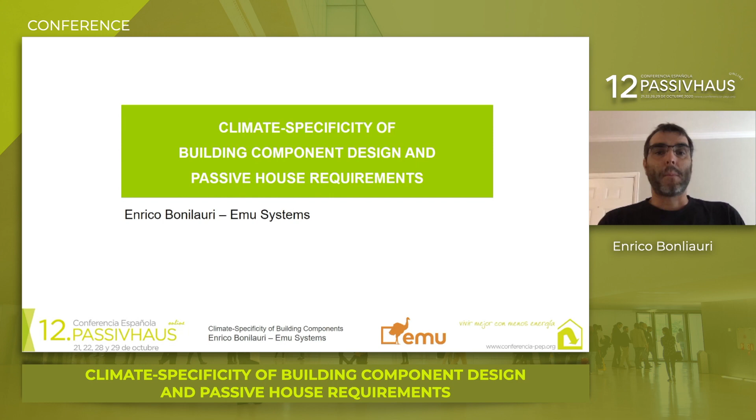What we do is teach builders in North America how to implement passive house cost effectively in different climate zones. The US and North America ranges from Florida, which is very hot and humid, all the way to Alaska, that is very cold and dry. So we need to educate professionals on how to implement the principles of passive house effectively in different climate zones in a way that is cost effective, safe, and that will deliver very good and efficient buildings that meet the passive house standard. So the presentation I'm giving you today is called Climate Specificity of Building Component Design and Passive House Requirements.

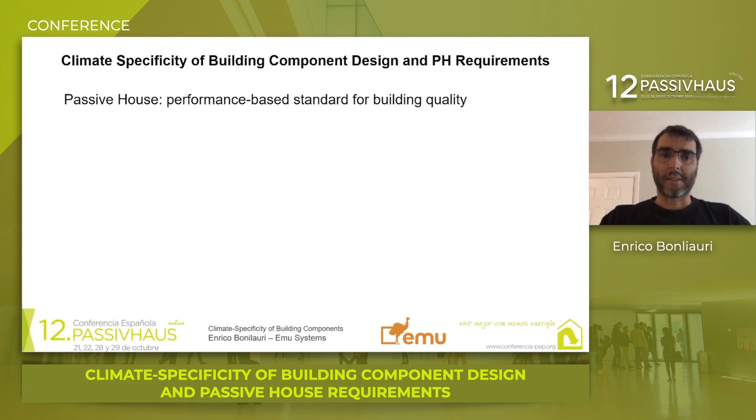So climate specificity is very important for any building design, and specifically for passive house and the success of these projects. Passive house is a very advanced performance-based standard for building quality with specific goals that deliver healthy buildings through high hygiene, very high thermal comfort. The buildings end up being very durable over time. And with that, you have very high energy efficiency. And the key to that is also to optimize all of the above in order to have very cost efficiency in the project.

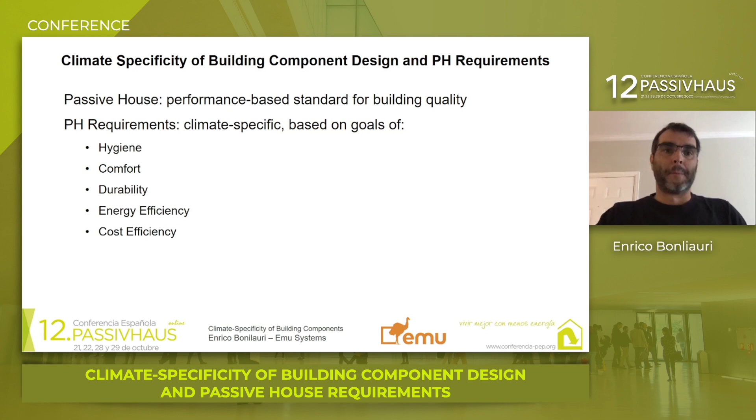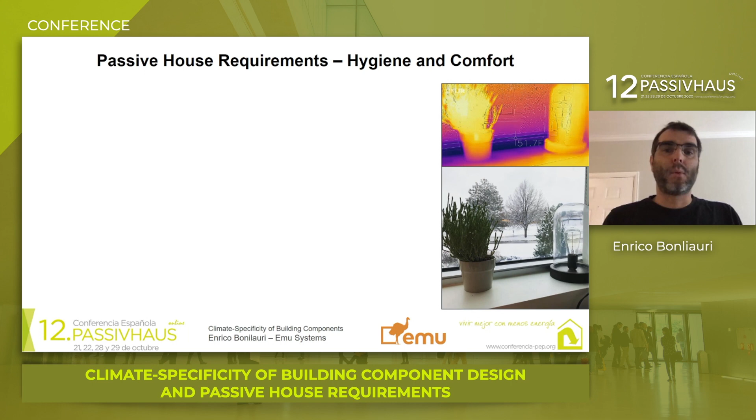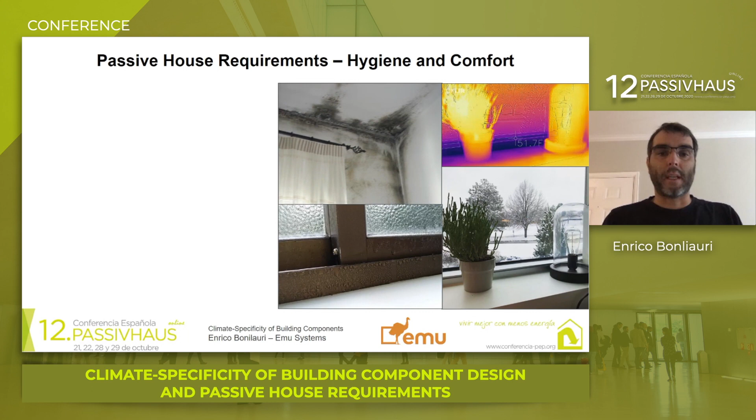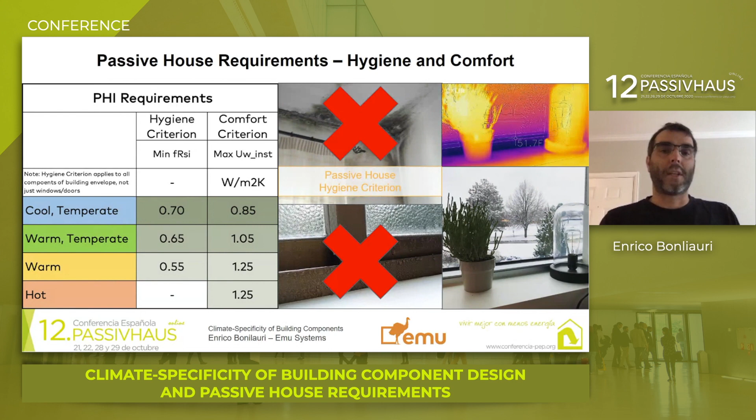So the hygiene and comfort requirements are part of the backbone of the passive house standard. Too often we see very poorly built buildings that are very uncomfortable in terms of temperature, as well as very poor management of moisture, resulting in condensation and mold. Part of the passive house standard is to have the hygiene criterion and the comfort criterion that are optimized by climate in order to avoid these issues by design. So you get rid of condensation and mold via the hygiene criterion, and you have very high thermal comfort thanks to the comfort criterion of the passive house standard.

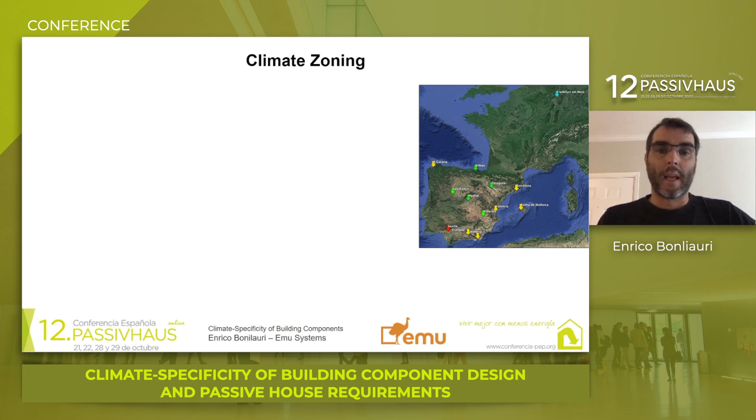This is climate specific. We have here a map of Spain highlighting different locations that we looked at for the development of this presentation. And the color of those arrows actually matches the climate zoning issued by the Passive House Institute. We see in Spain, we have climate zones ranging from hot to warm temperate. And in the map of Europe, we see also Frankfurt that we kept just because that's where the passive house standard came from. That is the cool temperate climate.

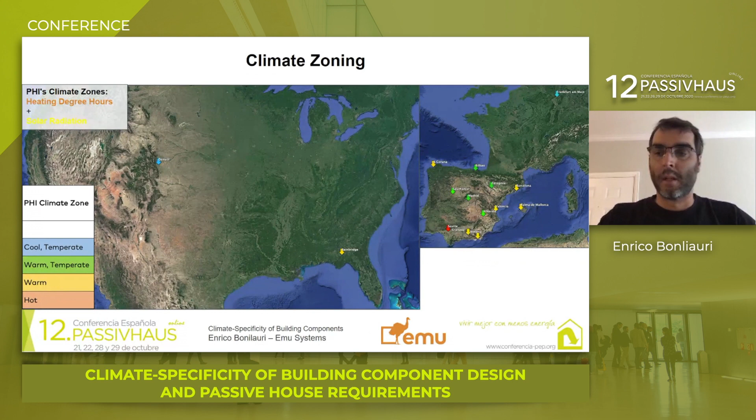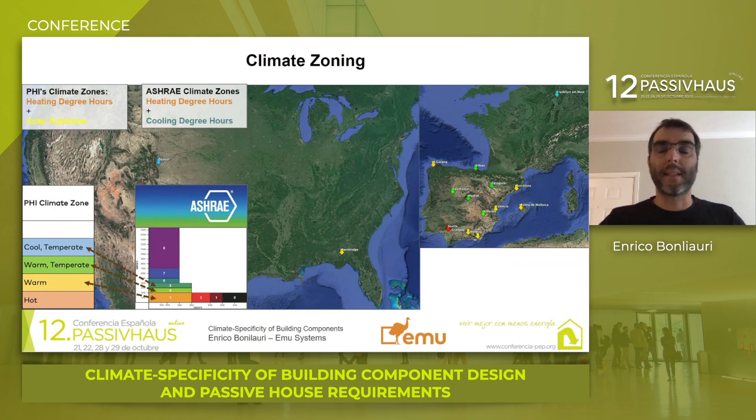The climate zones issued by PHI are actually based on heating degree hours as well as solar radiation, and other institutions such as ASHRAE base their climate zoning on a different set of parameters that include heating degree hours and cooling degree hours. There is some correspondence between the two, but it's important to understand that the way you label a climate may vary depending on the institution that is applying this label.

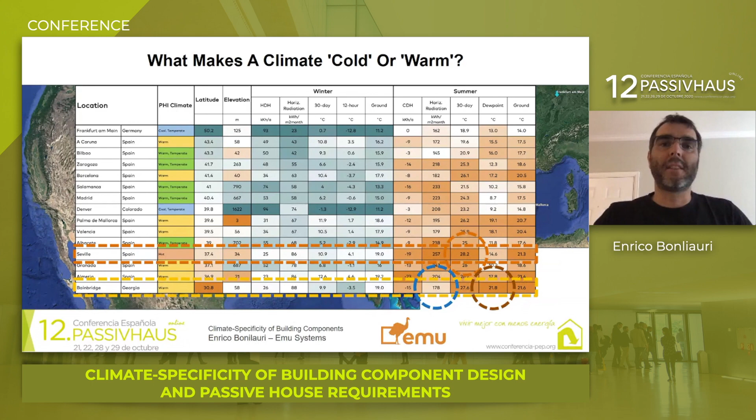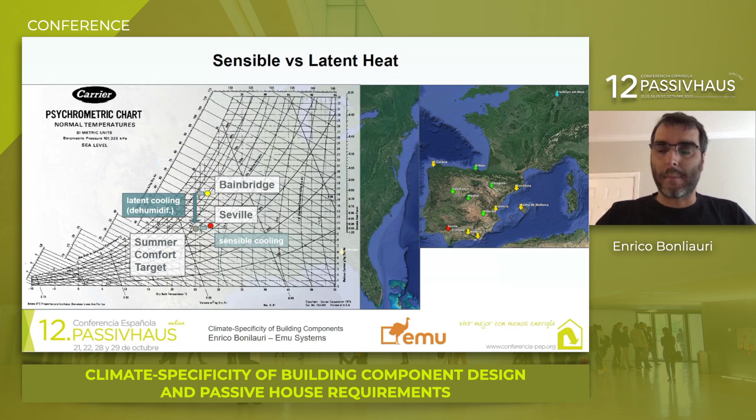Looking at the psychrometric chart, those differences between Seville and Bainbridge become more evident. We have the target summer comfort point at 25 degrees Celsius and 50% relative humidity. Seville is actually not too far away from that, requiring some sensible cooling but not too much dehumidification. Whereas Bainbridge is considerably more humid, so you need to work harder to meet that comfort target. The sensible cooling is fairly similar for both, but Bainbridge has a considerably higher need for latent cooling, that is dehumidification. So you can see how you need to develop a strategy for your building and its components to meet these climate-specific requirements.

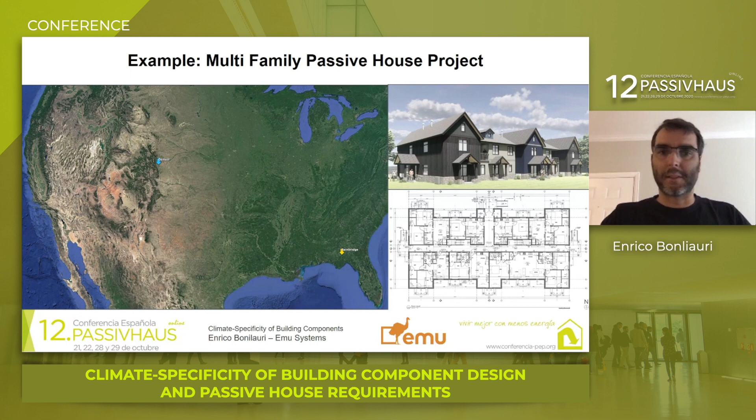So this is a project we have going on. It's 4 buildings of 14 apartments each, 2-story, fairly simple design, and they want to meet passive house certification. While the heating demand for passive house is capped at 15 kilowatt hours per square meter a year, the cooling and dehumidification demand is climate specific. So if the hardest thing to meet in Denver is the heating demand, in Bainbridge, Georgia, the most challenging part is actually the dehumidification. You need to work on the design side to meet that because it's difficult.

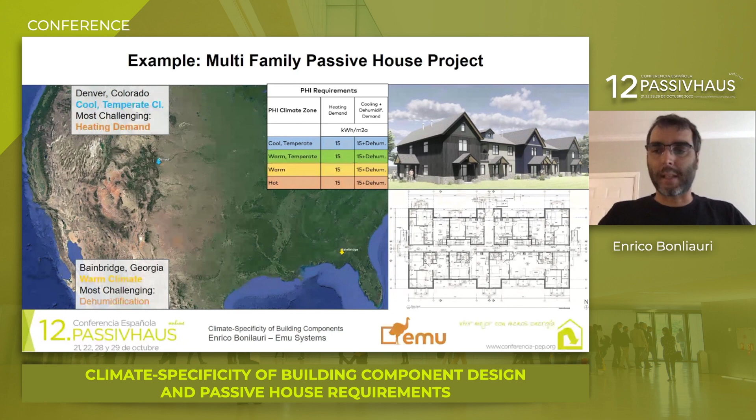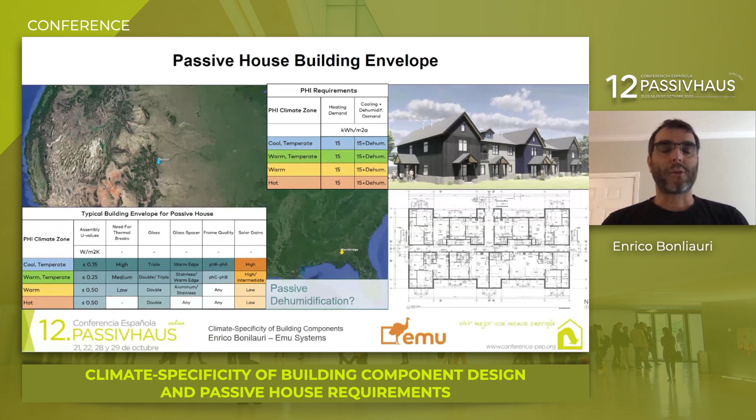One thing the envelope does not really help with is passive dehumidification. That does not really exist. So in trying to meet the dehumidification need for Bainbridge, we had to do some trade-offs for the project. Our goal was to reduce the amount of sensible cooling as much as we could, so we could free up some space for latent cooling in the passive house balance. And we modeled a number of scenarios.

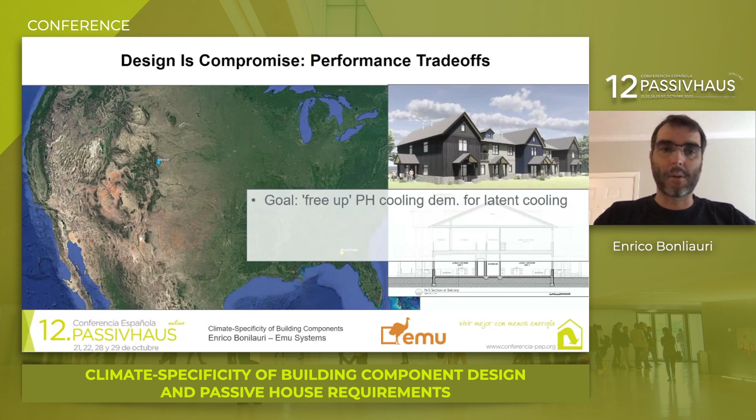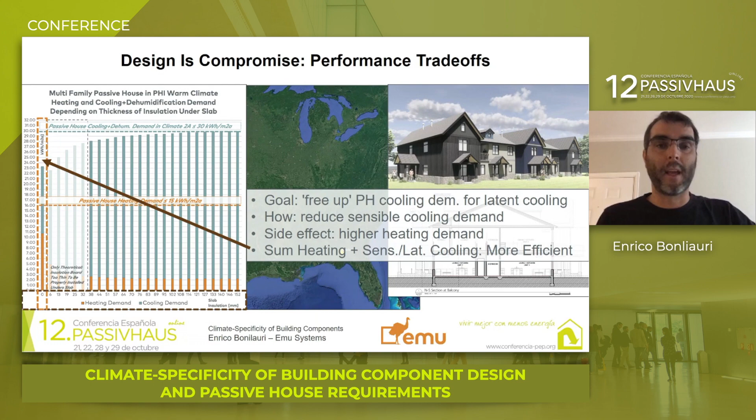The side effect is that the more you reduce the insulation under the slab, the more you couple your building with the ground, the less the cooling becomes, and you have, as a trade-off, more need for heating. However, looking at the total balance of heating plus sensible and latent cooling, the sum of the two resulted being at the lowest with no insulation under the floor slab. So in this case, we decided not to have any insulation under the floor slab of the building.

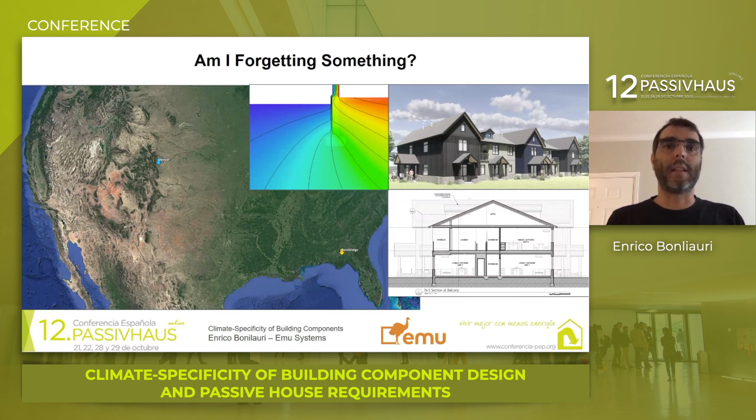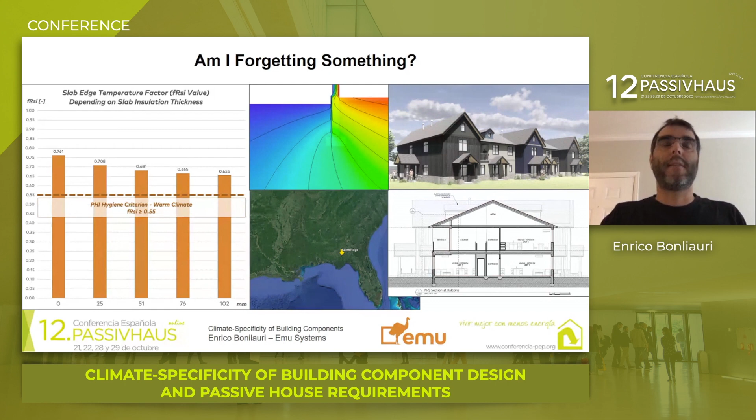It's important when you do this process to have all parameters in mind so you don't forget something. In this case, removing the insulation from under the floor slab, you may have condensation. Now, because Bainbridge is so humid, we're already planning on having active dehumidification separate from the sensible cooling anyway. This construction has a mini split system for sensible cooling and additional dehumidifiers for latent cooling. So we had a very good understanding of the humidity level inside the building, and via the temperature factor FRSI, we made sure we didn't have any issues with condensation on the floor. We modeled the temperature factor at the slab for the incremental steps of insulation, and in reality, even without any insulation under the floor, we ended up having no issue with condensation.

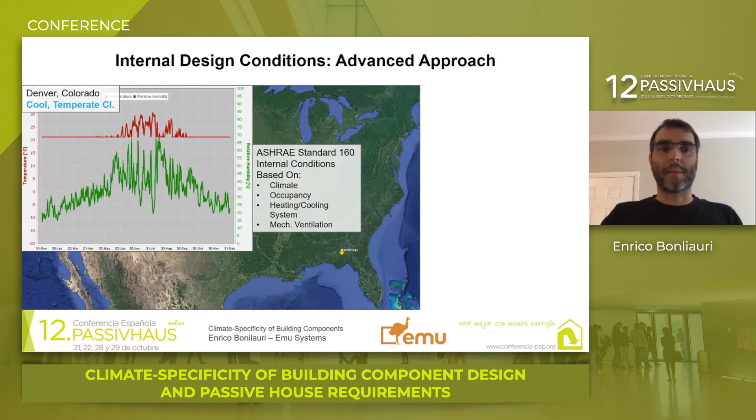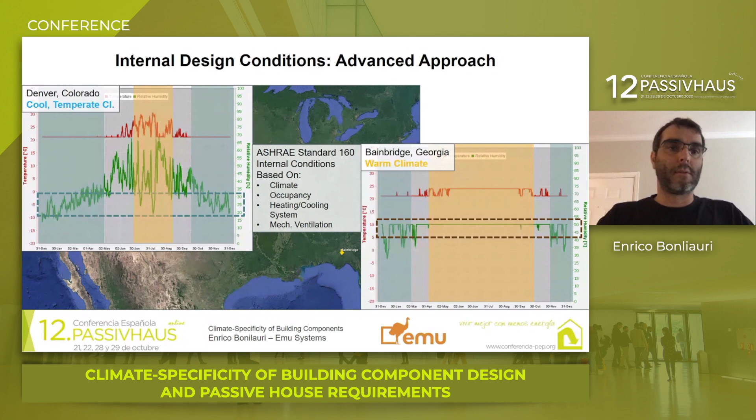In warm climates, you can get away with your air barrier being located also on the outside if needed, because the external temperature is not very cold, so that will not cause any convection to condensate. So in this approach, you need to really make sure that your approach to physics and to building science is up to speed with the most innovative method.

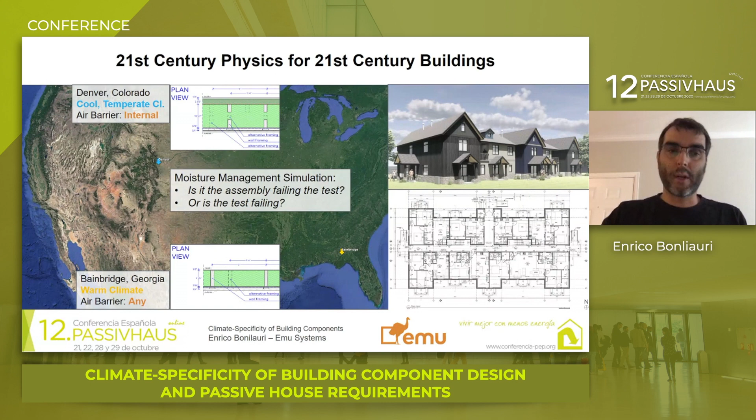If you look at the wall at the bottom of the slide for Bainbridge, and if you did a dew point method calculation, that is the Glaser method, you would fail the test. And that would be, if the test that is failing is not the wall that is failing, you would not have condensation in this wall. But the Glaser method, developed in 1958, is obsolete and oversimplified. It does not account for too many factors. So this wall would fail, whereas in reality it does not.

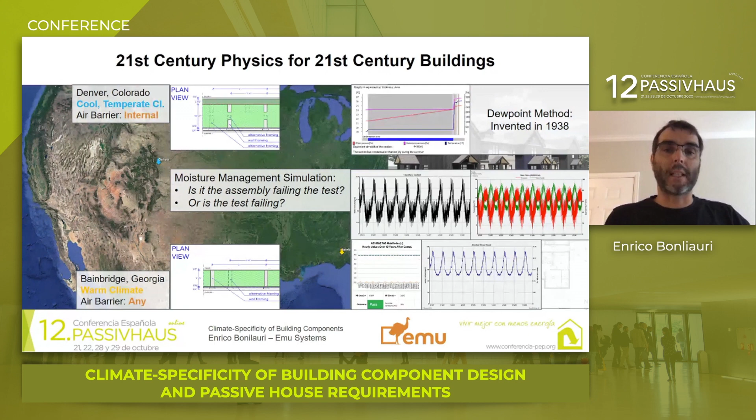In looking at more advanced building science, you see that even if we consider 10 consecutive years, accounting for infiltration from rain and exfiltration of air from the inside to the outside, the building does not accumulate water over time. The relative humidity, that is the green wiggly line, never meets condensation. This little graph shows the mold index according to ASHRAE standard 160, which shows mold does not develop inside the assembly. And finally, the wood panel OSB sheeting does not meet high moisture content that would cause the wood to rot. So all of these parameters show that with advanced building science, you can have better optimized building construction than you would have with older design methods, such as the Glaser method.

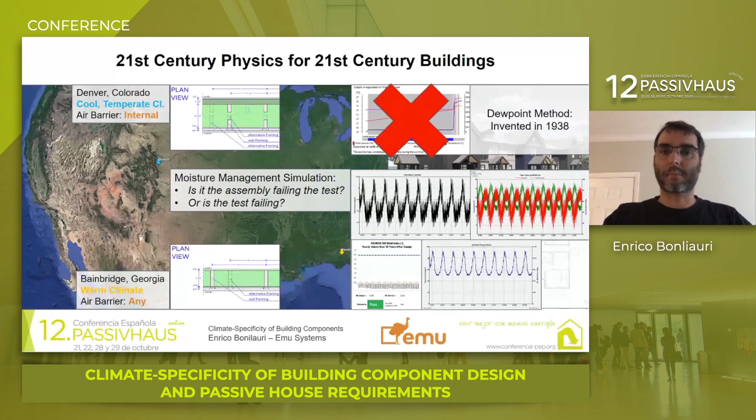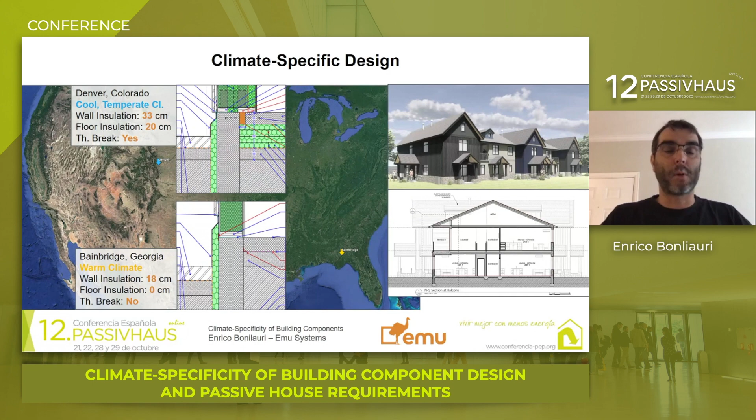For a warm climate, the same junction will look very different in that you do have insulation in the walls, but you have 18 centimeters and not 33. And you have no insulation under the floor slab, which saves a lot of money and actually improves the whole building performance in terms of heating and cooling. At the same time, you do not have a thermobreak between the internal floor slab and the foundation wall because you don't need it. It's very important for you to understand what you actually need in passive house so that you can make your building optimized both for energy performance, cost, and health.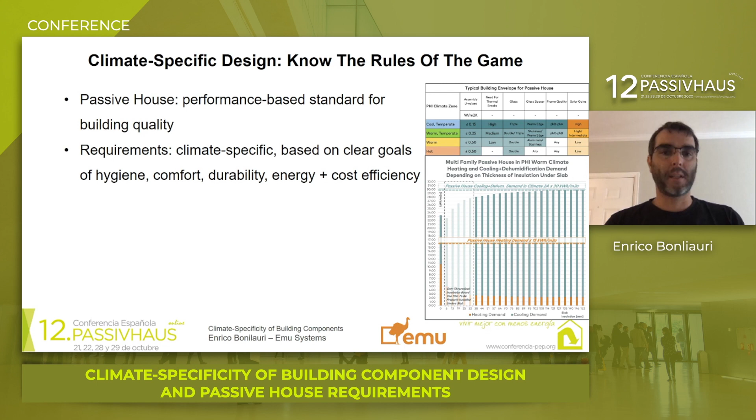So passive house is a performance-based standard for building quality. It's not a religion. It's very important for you to understand what you actually need and what you don't. The requirements, including the hygiene criterion, the comfort criterion, and all of that, are climate-specific, and they are based on clear goals for hygiene, comfort, durability, and energy and cost efficiency. It's key for you to understand these goals in order to optimize the design for the local climate. It's very important for you to understand what you do need and what you don't need. What you don't need, you can avoid, and you can save money and time.